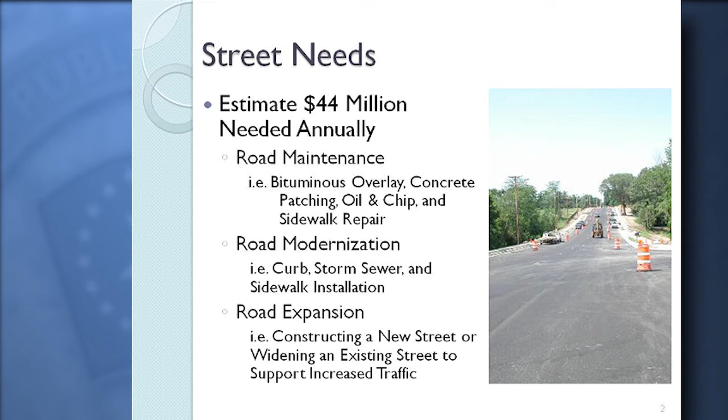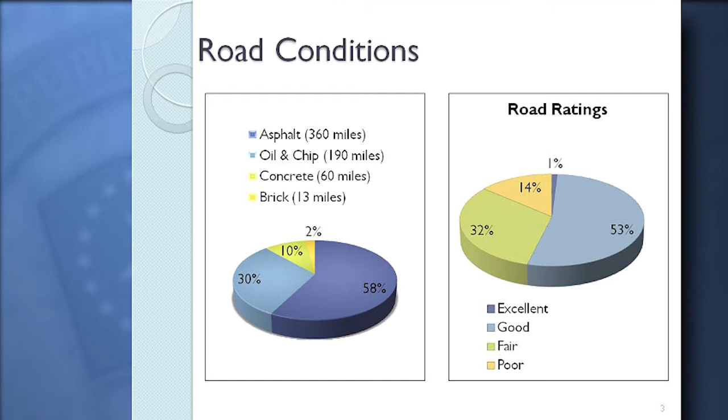Approximately 625 centerline miles of roadway are maintained by the City of Springfield: 360 miles of asphalt roads, 190 miles of oil and chip roads, 60 miles of concrete, and 13 miles of brick roads. Today, approximately 46% of those streets are in fair to poor condition and in need of repair.

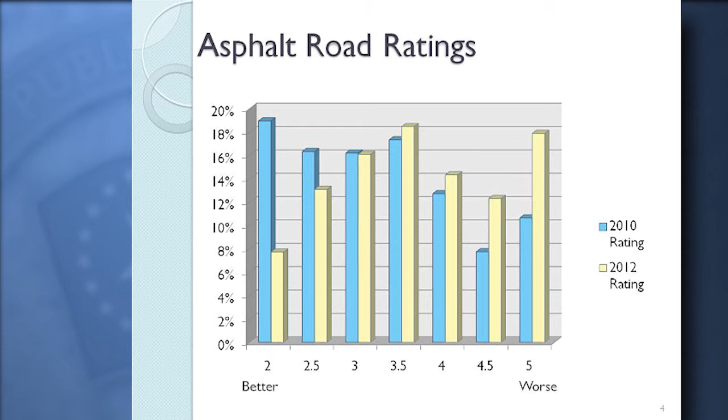The engineering staff within Public Works annually analyzes road conditions, ranking from the poorest to the best. The fall 2012 ratings indicate a rapid increase in the percentage of roads in poor condition and a decline of those in good condition. There are several factors contributing to our deteriorating infrastructure.

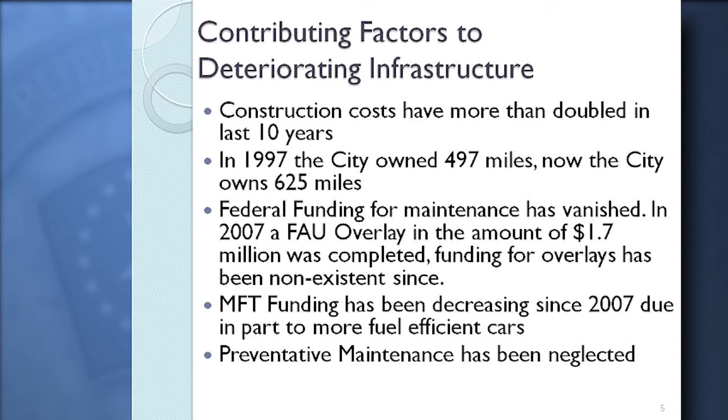The increase in construction material and labor costs, the increase in the number of miles maintained by the city from 497 in 1997 to 625 miles today, and the decline in state and federal funding assistance all have played a part in the state of disrepair we now find our streets, sidewalks, and sewers. Over the last 10 years, the cost per ton of asphalt and concrete has more than doubled.

Springfield maintains many more miles of roadway in comparison to similar populated cities. These additional miles are maintained with a limited and declining budget. As infrastructure funding from state and federal sources has declined, the amount of roadway we must care for has increased.

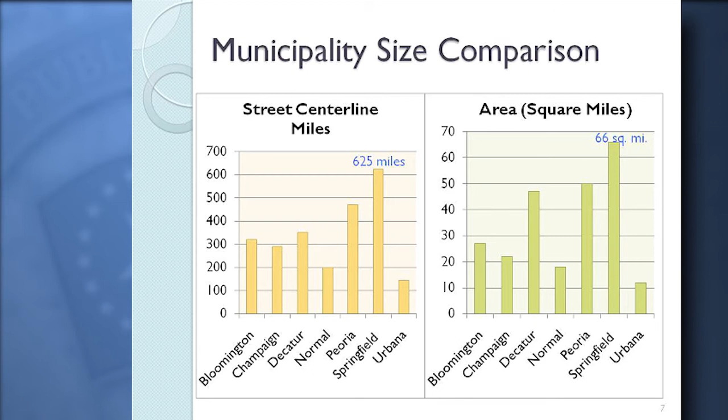Funding for our local infrastructure needs is generated from these primary sources: $4.4 million from a 0.25% sales tax, $1.1 million from a 2% hotel-motel tax, and $2.9 million from motor fuel tax funds collected by the state. In addition, the Department of Public Works continues to seek available grant funding for safety and bridge projects, as well as utilizes tax increment financing when possible. Additional funding is anticipated from gambling revenue that is still to be realized with the continuing gambling machine expansion.

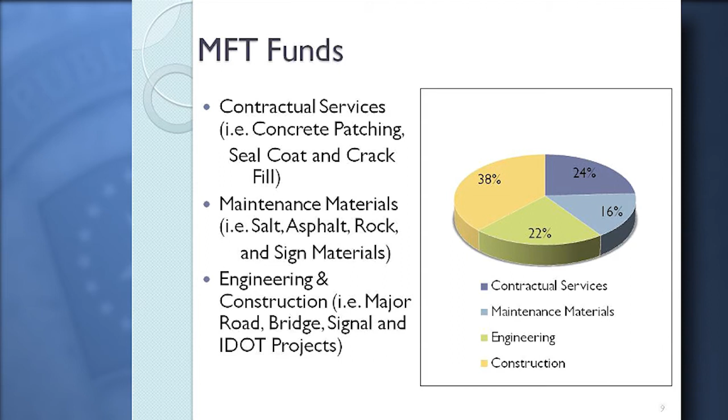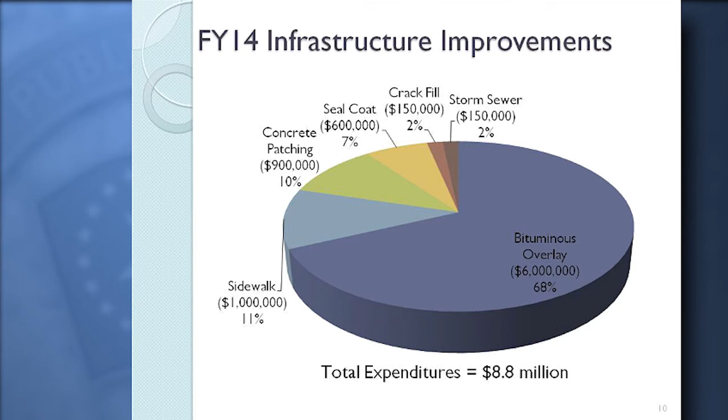Motor fuel taxes are utilized to cover a number of infrastructure maintenance projects as well as material purchases. Additionally, when participating in a state-funded expansion or improvement project, MFT funds are utilized for local participation matches. The Department of Public Works anticipates spending approximately $8.8 million in available funding on infrastructure projects in the coming year. The largest expenditure will be the $6 million on overlay and $1 million on sidewalks.

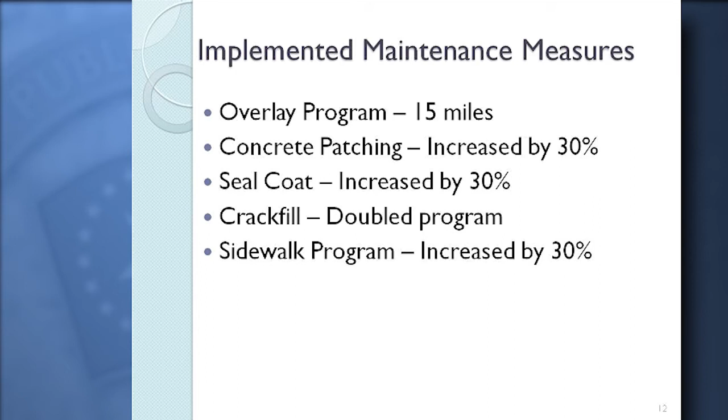Over the last several years, as the designated revenue for infrastructure has increased, expenditures on infrastructure have matched those levels. At the direction of Mayor Houston, the Department of Public Works has implemented an infrastructure maintenance plan that has increased overlay to 15 miles a year, increased by 30% the concrete program, seal coat program, and our sidewalk programs, and doubled the crack fill program.

The question that is facing our community is what we should be spending to stop the decline of our infrastructure. What should we be spending on maintenance for our streets, sidewalks, and storm and sanitary sewer systems? At the direction of Mayor Houston, the Department of Public Works engineering staff has prepared a plan to stop the decline of our infrastructure.

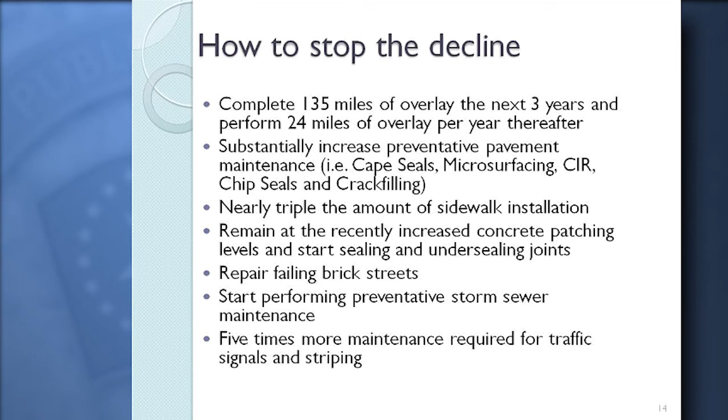The proposal calls for an increase in spending on streets, sidewalks, and storm sewers over the next 3 years. That plan calls for overlaying 135 miles of asphalt roads in 3 years, then moving to an annual overlay program of approximately 24 miles annually. The program would call for tripling our expenditures on sidewalks and substantially increasing our expenditure on preventive maintenance programs.

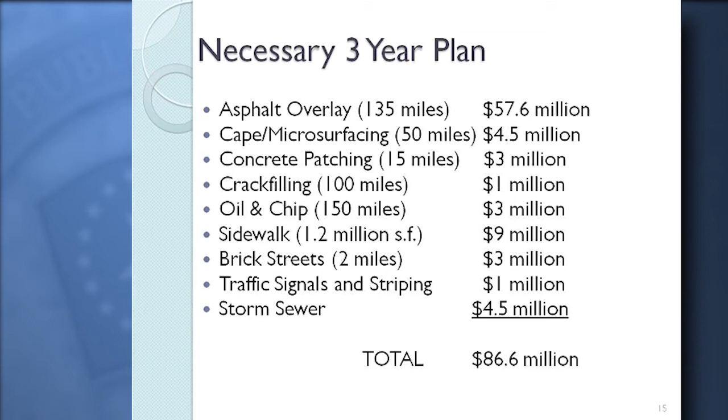The necessary 3-year plan will call for 135 miles of asphalt overlay, 50 miles of preventive maintenance, 15 miles of concrete patching, 100 miles of crack filling, 150 miles of oil and chip road work, 1.2 million square feet of sidewalk work, 2 miles of brick street repair, and spending $1 million on traffic signals and striping, and $4.5 million on storm sewers. The plan calls for spending $86.6 million over 3 years and will impact every area of the city.

Upon the completion of the 3-year plan, the Department of Public Works is recommending an annual expenditure of $22.5 million on streets, sidewalks, and storm sewers to prevent a return to our current condition of disrepair. Our current annual funding is anticipated to fall to $7.5 million annually without an additional investment in our infrastructure. The Department of Public Works estimates an additional $15 million is necessary.

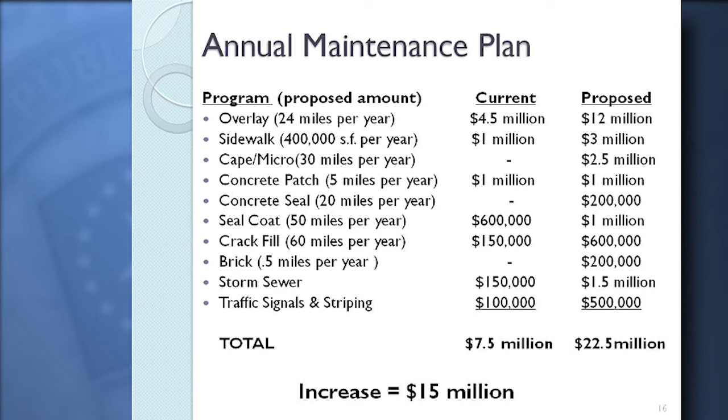If our city continues to invest in our infrastructure at the current rate, we will see 60% of our roads in need of repair by 2018 at an estimated cost of $110 million for repair. By investing at the recommended levels for the 3-year plan and the increased annual level in year 4, an estimated $21 million will be saved. It is anticipated that this level of savings is minimal, as with continued neglect, the ultimate repair of the deteriorated roads will require more work.

In addition to those needs, there are concerns with the deterioration of our aging sanitary and combined sewer systems. The sewer fund was established in 1956 to maintain the combined sewers and separate sanitary sewers within the city of Springfield. This fund was set up as a lockbox to fund repairs and improvement projects for the city's 140 miles of combined sewers and 355 miles of separate sanitary sewers.

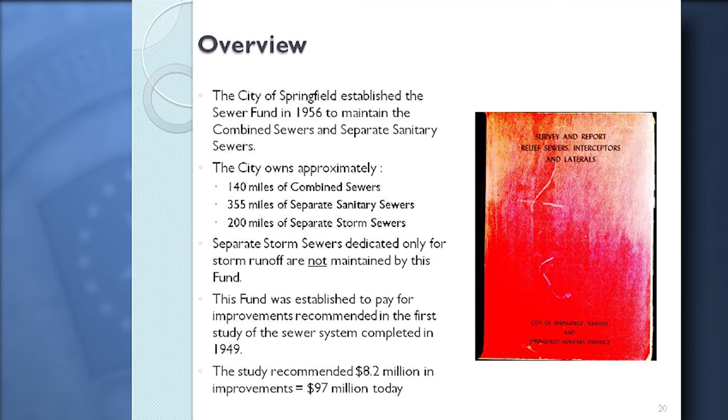The city also has 200 miles of separate stormwater sewers that must be maintained through other funds. Sanitary sewer funds cannot be utilized for stormwater sewer maintenance. The Sewer Division of the Office of Public Works is operated through the funds generated through the sewer fee. The division is responsible for monitoring, inspecting, and repairing the system and dealing with issues that develop when the system fails. The cost associated with the operation, as well as the aging system, have increased to the point where the funding for necessary maintenance and improvement projects is inadequate.

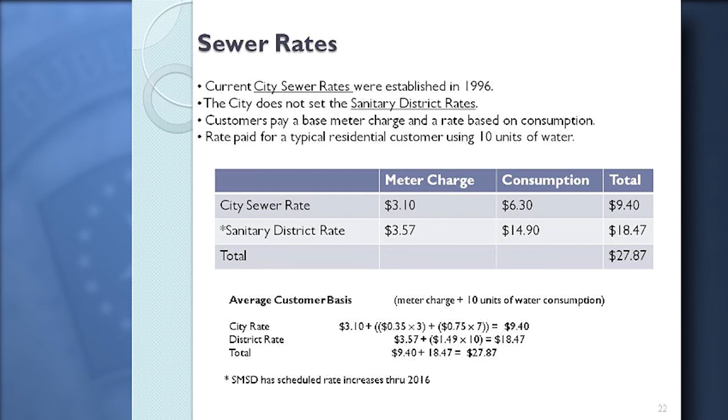The sewer rate that funds the care and maintenance of our system was last adjusted in 1996. The average ratepayer contributes approximately $9.40 per month to the city sewer fund. There are separate sanitary district rates that are charged by the district to fund the treatment of the sewage. The sanitary district is a separate governmental operation from the city. In comparison to surrounding communities, the overall sewer charges are relatively low for Springfield.

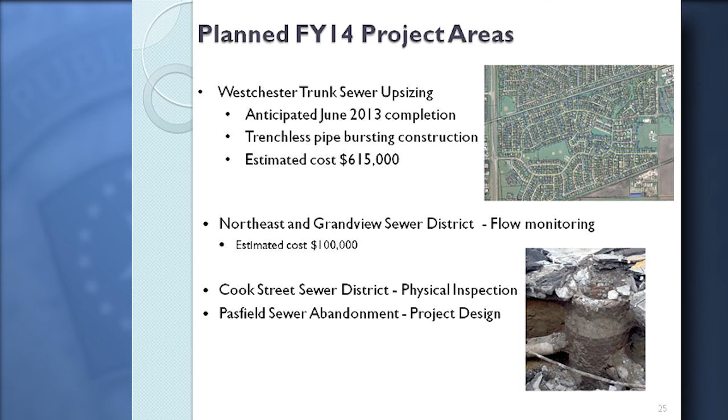During the previous construction season, the sewer division completed approximately $625,000 worth of sewer projects. This year, the sewer division will be completing approximately $615,000 in projects. Sewer work in the Westchester neighborhood and design and study work in the Northeast and Grandview sewer districts, the Cook Street Sewer District, and the Pasfield Sewer abandonment are anticipated.

It is important to point out that our sanitary sewer collection system is regulated by the Environmental Protection Agency. Springfield has recently entered into an administrative order to report overflow data and to increase our monitoring to the EPA. Over the course of the next year and a half, we will be reporting information to the EPA regarding our efforts to eliminate overflows and backups in compliance with the Clean Water Act.

Many communities across the country have been hit with civil penalties for their failure to comply with the Clean Water Act. In those cases, the EPA has mandated, through consent decrees, the rates and projects that must be completed by a community. When communities have failed to take responsibility for their system's maintenance needs, the EPA has stepped in and mandated the terms in which they will be addressed. We do not want to be in that situation in the city of Springfield.

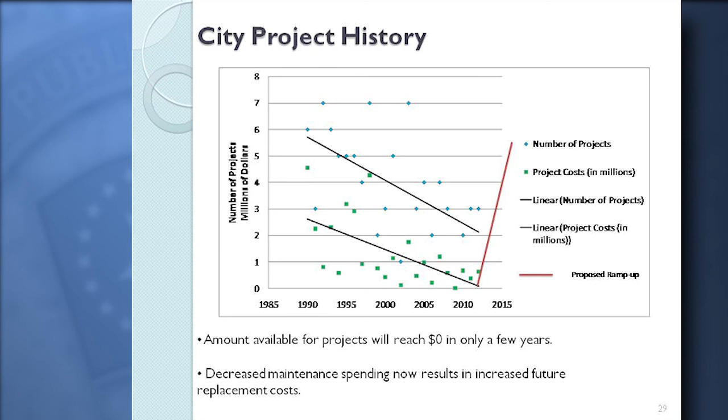The question facing our community is what needs to be done to maintain and repair our current system and potentially avoid regulatory penalties. While headcount has decreased over the years, the cost of operations and emergency repairs continues to rise. At our current funding levels through the city sewer fund, we will in the near future not have enough to cover operation and our capital improvement projects.

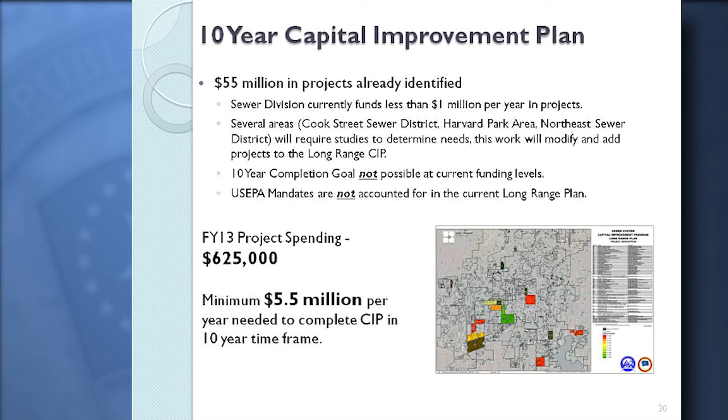It is estimated there is a minimum of $55 million worth of projects that need to be completed over the next 10 years on our sanitary and combined sewers. These are projects that we know need to be completed. Additional projects may become necessary as we continue to collect more data on the condition of the system. The Sewer Division spent $625,000 last year on projects. We are recommending an annual project investment of $5.5 million a year. Our infrastructure is in decline and will accelerate unless we begin to invest more to maintain it.

Mayor Houston has offered a plan that calls for $86.6 million in spending over the next 3 years and $22.5 million each year thereafter. In addition, the mayor has proposed spending $5.5 million a year to address our sanitary sewer system issues. The mayor and the city council are now in the process of identifying the investment sources to implement a plan that will move our city forward and maintain our infrastructure assets for future generations.